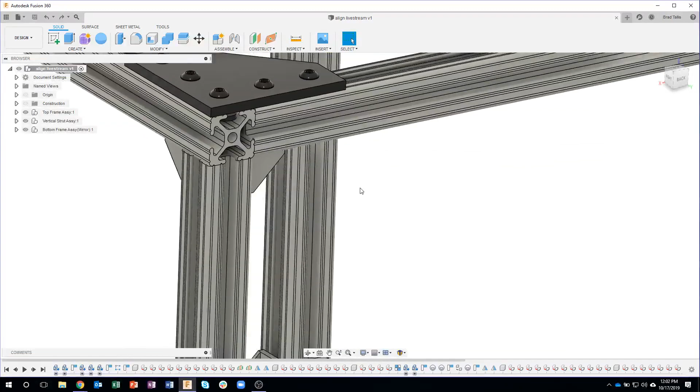Okay, so what I'm going to be talking about today is positioning parts in place without having to create a ton of joints. In fact, I'm going to zoom up on this corner here, and you'll see we're going to learn about bringing in some 80/20 extrusions, some mounting plates. You'll notice I even have some screws in here with their specialty T-nuts that slide in there. And believe it or not, there's not a single joint in this assembly, and you'll see that as we go through. So I'm going to go ahead and start a new design.

And you might ask, why not use joints? Well, when we're mocking something together like this, I don't want to have to worry about specifying all those positions and capturing positions, etc. I just want to mock up the design, and this is a rigid structure, so there's no movement going on. So I really don't need all of the different joint types, like revolute and the slider. So we're going to learn a new command under the Modify menu called Align, and I'm going to show the functionality of this.

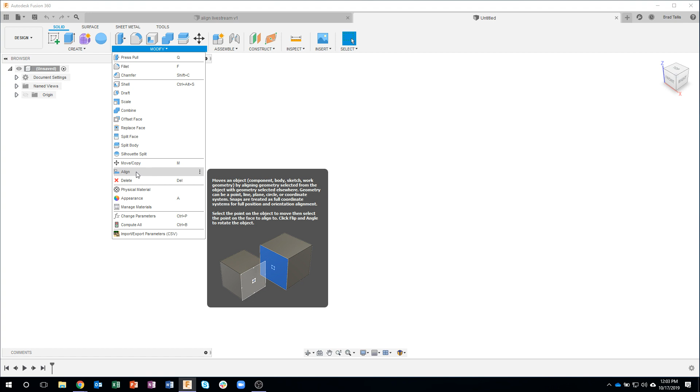We're also going to learn a couple other tricks, and a shout out to Peter. He made a funny comment on the Fusion 360 webpage saying, I love learning all these new tricks, so I appreciate that. I'm glad everybody's learning something.

I've shown this in the past where you can insert a McMaster-Carr component. But there's also another really powerful option in here called Insert a Manufacturer Part. And when I do this, it's going to bring up a web page, of course, on the wrong screen. So let me bring this over. Make sure that's working okay. Just a second here. Okay. And I want to get back so I can see what everybody's seeing.

Okay. So this is bringing in a manufacturer part, and you'll notice that it's got a bunch of different manufacturers. So for example, at the very top, we've got 80/20. You'll see ABB in here, and you'll probably recognize some of these, such as Bimba cylinders. There's a lot of electronic parts in here, like Eaton has a bunch of stuff. Maybe you need igus chains, so you can click on the I over here, and here are all of the different igus products. And so I'm going to show how you can insert this type of stuff right into Fusion.

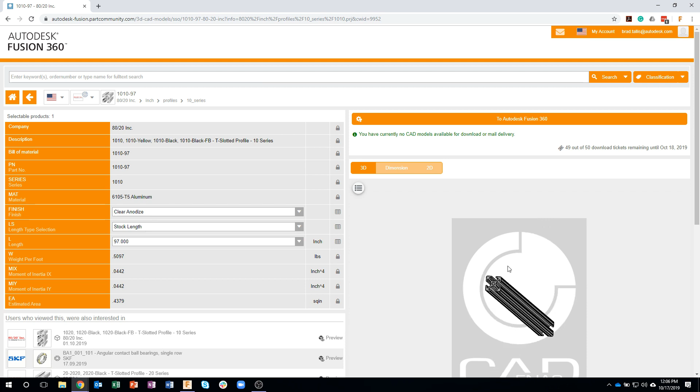And it gives you options, and it even brings up a 3D viewer. In fact, if I kind of rotate it, I'm going to have to zoom up here so you can kind of see the end profile. This is a really long example, so that's why it looks so long. But you can see that sure enough, that's a 3D model of that 80/20 extrusion. So you can verify that it's correct.

It gives us all the information about it, and then you'll notice right here it says stock length, which is 97. Well, I can come in here and say I want to do a custom length. And I can either drag or I could type it in. So for example, I'm going to come in here and do a custom length. Let's just do a custom length of 24.

Okay. Now you'll notice it says, okay, you've changed something. If you want to update your preview, you can, and it'll update that 3D preview, but you'll notice it'll be much shorter, a better representation of the actual part. So I really like this built-in 3D preview, so I can verify that, yeah, that looks pretty good.

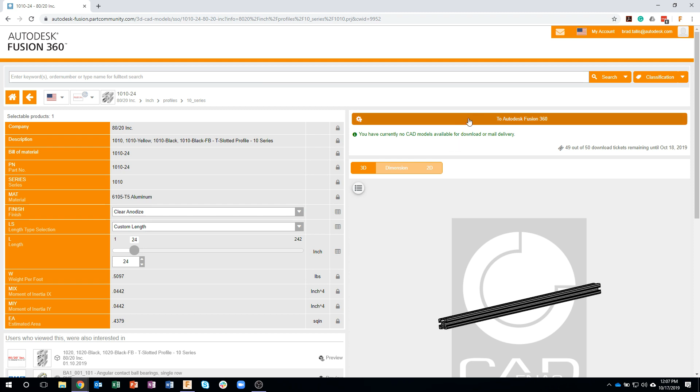Okay. Then you'll notice right here, to Autodesk Fusion 360. So I just click on that button right there, and it's going to bring up this little dialog that says open this application. So go ahead and say open. And let's confirm that that's going to work. So it's because I have these multiple screens. Yeah, there it goes. I'm going to have to bring up Fusion. And here you can see there is that 3D model from 80/20.

Now it's pointing up and down. I want it to lay horizontal, so I'm just going to grab this little button right there and kind of drag that down until I see 90 degrees. And so now it's kind of laying flat in the top orientation, which is what I want. I'll say okay.

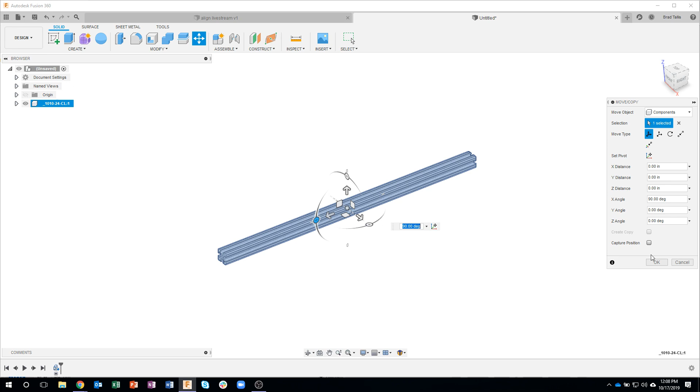Okay, so that's how simple it is. I did not have to draw the profile and extrude or anything like that. And this is just like any other Fusion file. So for example, I could click on this face, say press pull, and I could move and change the length of this part if I needed to. So by default, I brought in a 24-inch part, but I could come in and make changes to it just like it was created inside of Fusion.

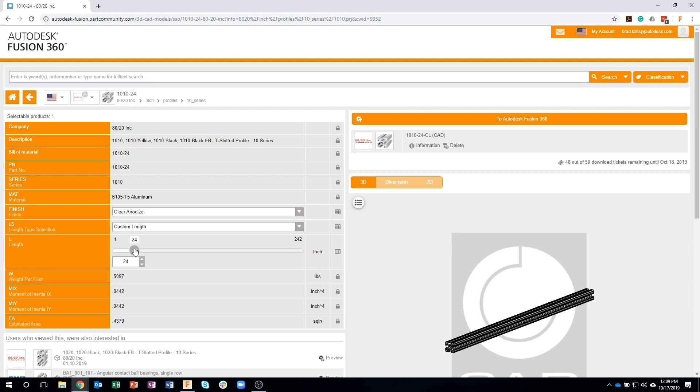Okay, so I'm going to do this a couple times to bring in some other parts. So let me jump back to that page right here. And now I want a custom length. Let's just do a custom length of 16 in this case. I'll say to Autodesk Fusion 360. Click on that open launcher. And I'll just jump over to Fusion, and you'll see it come into Fusion and add it into our current design. So there it is.

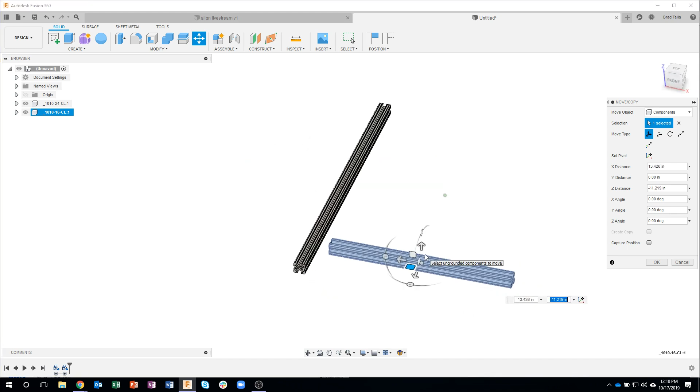Okay, so I'm going to go ahead and rotate this a little bit. And I'm going to rotate it this direction. And maybe I'm just going to kind of get it close to where it needs to go. Okay. So you can kind of see it's sort of floating in space right now. And I'm going to leave it where it is. I'm just going to go ahead and say OK.

And notice my browser. I'm going to go ahead and make this a little bit smaller. So here's the two different parts. There's the 24-inch part and there's the 16-inch part. In fact, I'm going to move the 24-inch part over just a little bit so it's not in the default location, because that's going to make things a little bit more observable in the near future. Otherwise, things would come in perfectly, and I want to show that it doesn't come in perfectly every single time, and we might need to reposition. Okay, so I've got my two parts.

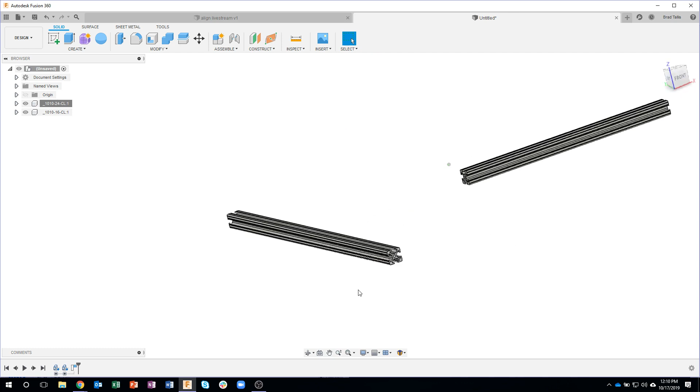Now, I want to line these up. And you might say, okay, we'll go ahead and use the joint command. So I'm going to say joint. Now, when you do a joint command, you get all these little markers and stuff to line things up. Well, for example, I don't have a sharp corner right here, so I really can't go corner to corner. In fact, if I zoom out, you'll see over here, there's not a corner to go to. And so creating a joint isn't always the best solution.

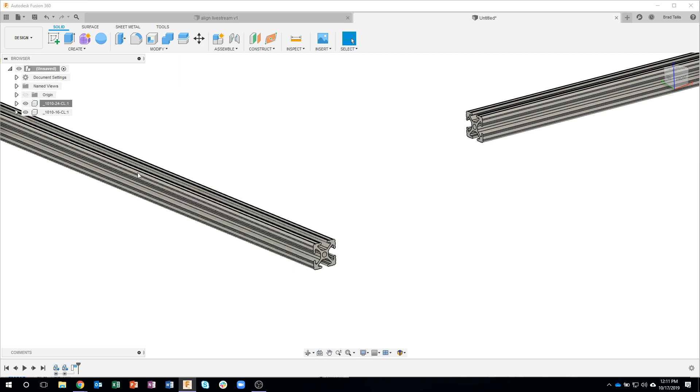So what we're going to do instead is we're going to use the align command. So I'm going to click on align, and you'll notice it allows us to align components from and to. So what I like to do is I like to get it lined up in 3 different axes. So for example, I'm just going to click on this face. I could click on these little markers. It really doesn't matter. But I'm just going to click on that face because I want to align that face with a face over here. So for example, this face, I want it to butt up against this face.

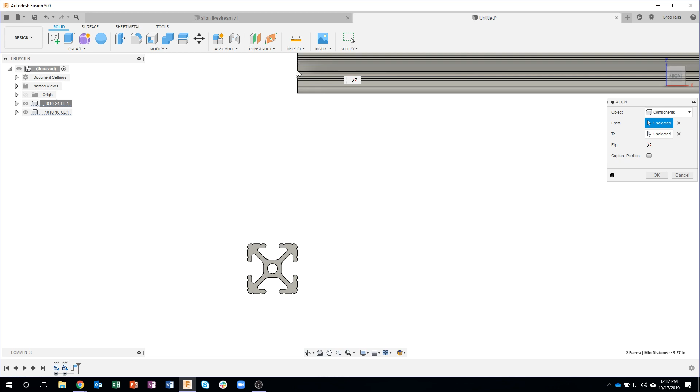So watch what happens when I click. You'll see that part slide over. And if we look at it from the side, or from the front, you'll notice that those are now lined up. So it aligned that face with this face down here.

Now I'm still in my align command, and this is what I think is so cool. I don't have to do 3 separate align commands. I'm just still in the align command. Maybe I'll say I want that face to align with this face right here, and you'll see it snap down. So sure enough, if we look at it from the front, we can see that we're aligned against that face and we're aligned against the top.

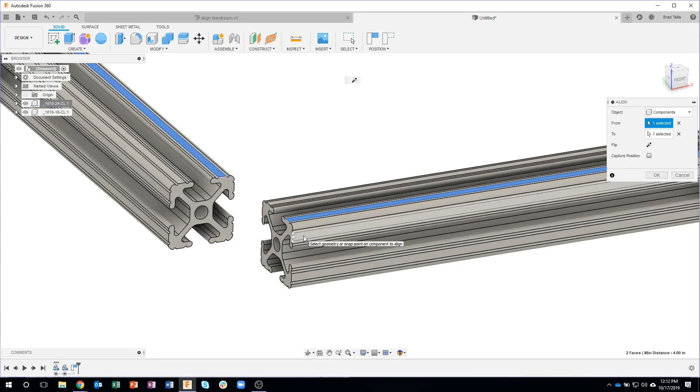And so really the last thing we need to do is say, okay, let's align that face with this face over here. And you can see how it slides that part into the correct location. And I'll go ahead and say okay. And there it is. And now you can really visually see that sure enough we weren't able to line up any corners or anything like that with a joint command. It would have been pretty difficult. I mean, it's doable, but I really like the align command. I think it's so much faster.

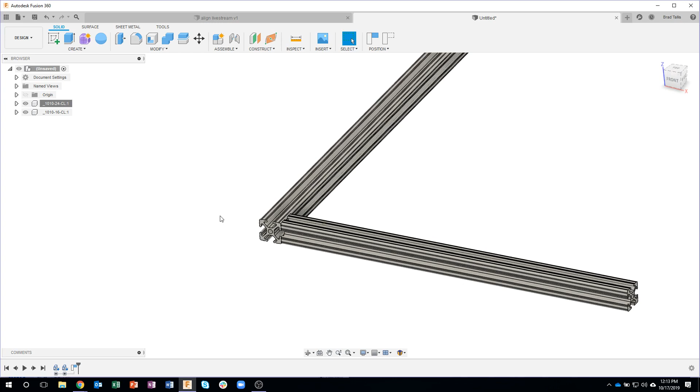Okay, so now I got these 2 parts where they need to be, but I want to join them together. So let's go back out to that page. And I'm just going to back up a couple steps. And I'm going to go into the joining plates. So I'll click on joining plates. And you can see all of the different manufacturer joining plates. And I can't emphasize how cool this page is. I mean, I use McMaster-Carr all the time, but this is so powerful with all of the different manufacturers out there.

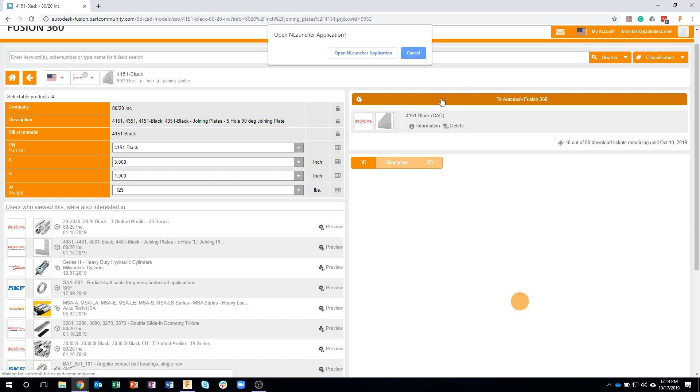Okay, so it looks like this guy right here. I'll use this one. Okay. Gives me, again, some options, tells me what the dimensions are, gives me a preview of what that's going to look like in my browser here and all that kind of stuff. Looks good. Even tells me what other people were interested in with this part. It's kind of cool. I'll say to Autodesk Fusion 360. Again, I could have sketched this, I could have drawn it, but that would have taken quite some time. So why not just bring in the manufacturer's part?

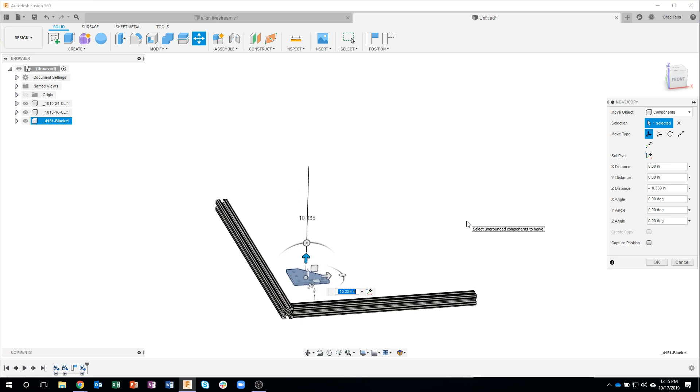Now it's pointing the wrong direction, so I'm going to go ahead and rotate. Let's just go 90 degrees that way. And I like to get it fairly close. So I usually look down at the top view, kind of position it where it sort of needs to be, and then I'll kind of zoom or rotate to the front view and just bring it down. Oops, a little bit too far. Something like that. I'll go ahead and say okay. And now it's kind of floating out in space, but it's fairly close to where it needs to go.

Okay, so let's use the align command. So I'll say align from. So I like to get it where it needs to go first. So let's just say maybe that face is going to sit on that face there. You see it kind of slide down a little bit. Then I could say that face and that face there, and you see it slide toward me. And then finally, that face and this face over here. And it slides into place.

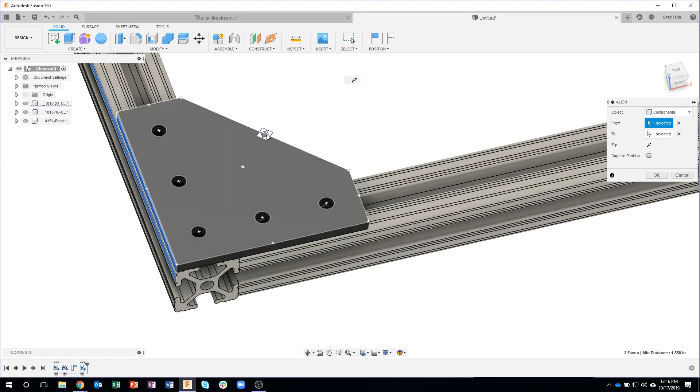Notice I'm not having to grab any of these, oops, wrong button, any of these tick marks or anything like that. I'm just basically grabbing faces. I'm saying align that face there with this face here, for example. It's very, very quick. I'll say okay, and it's now in the correct position. Hopefully this is making sense.

It looks like Aaron is actively answering questions.

So, okay, now let's bring in some hardware. Again, don't need to draw it. Let's just go out here. I'll back up a couple steps and say fastening options. Sometimes you can do a search, and I think it's 3042. Let me just do a quick search for that. It's from my notes when I was doing this earlier. So you can see all the different product numbers, and sure enough, there's 3042.

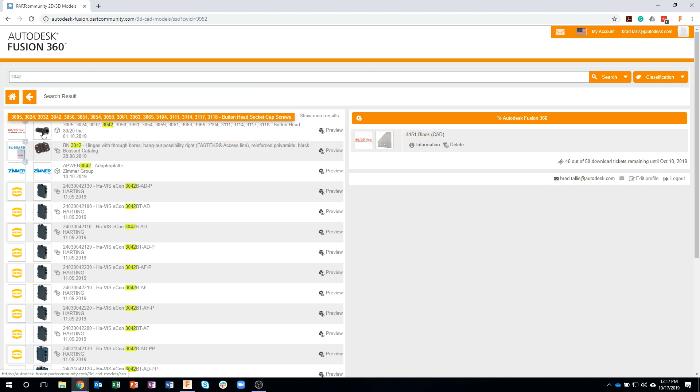It's this socket head cap screw. I'm sorry, not a socket head cap screw, but a button head cap screw, it looks like. So I can rotate it around, see what that looks like. I can specify the different threads in here if I need to. It's really cool, the different lengths. I'm just going to use the default one and say to Fusion 360.

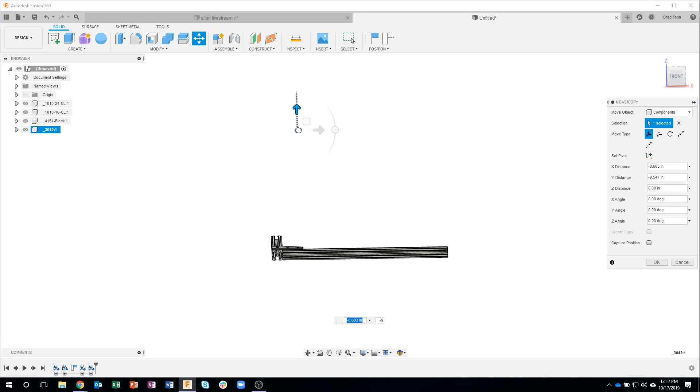It'll switch over to Fusion. Okay, and again, I like to get it sort of close, so I go from the top. I'll just kind of drag that over. Bring this down a little bit. And the only reason I do that is because I can kind of zoom up on this area and see that, oh, sure enough, the screw is pointing in the wrong direction. So I like to kind of get it oriented first. So I'll say 90 degrees.

Now I could use the align command, but you'll notice I'm in this move command right now. It's allowing me to move it around. And by default, it's allowing me to do a free move where I can just kind of move it around. But there's one in here called point to point. So I'm going to say point to point, and let's just look at the bottom of the head here, and you can see I can grab this edge, and it's a little hard to see, but there's a point right in the middle, right there. So if I just click on this edge, it's going to grab that point.

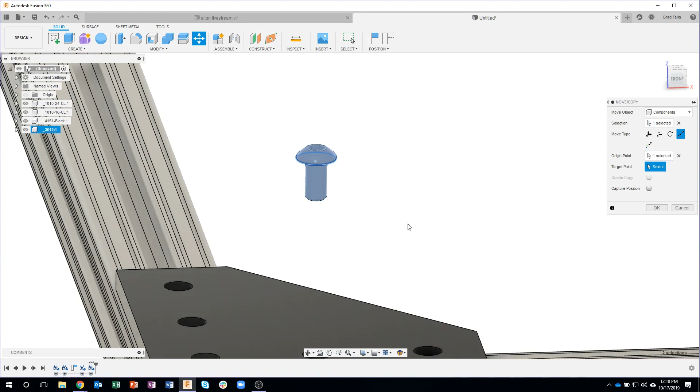Oops. That's my origin point. And then the same thing over here. I'm just going to kind of get near this circle and click, and it's going to move that screw from where it was to that new location. Let me go ahead and say okay. Because I picked this bottom edge of the screw head, it lined it up with the surface of the plate, and it's perfectly lined up in the circle. So it's kind of like a free move that we got. Didn't cost us anything.

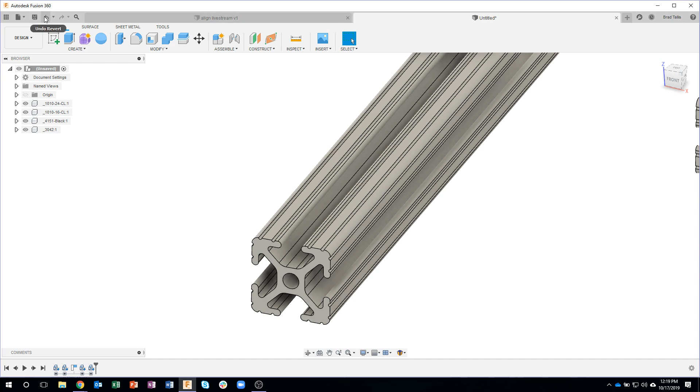Okay. Now, I think I see some people asking questions about, is align just like doing joints and stuff? No. In fact, if I grab this plate or this screw, I can move them out of location. There are no constraints or joints or anything like that being created as we're doing this. That's an excellent question. Oops. Let me undo back. So it's just basically getting them in the correct location, but there is nothing defining that these are constrained or jointed together. But we're going to get to that here in just a moment. We're going to learn some tips and tricks with that also.

Okay, so we can kind of see that sure enough, that's coming down through, and maybe I want to create a drawing of this or an exploded view later. So I want to actually show how this thing is going to get assembled. So I'm going to bring in one of their special T-nuts, I guess they're called. So let me back up a little bit, and I'll go to the fastener. Let's do this guy, and you'll see the different kinds that they have. So it basically looks like a special nut that can slide through.

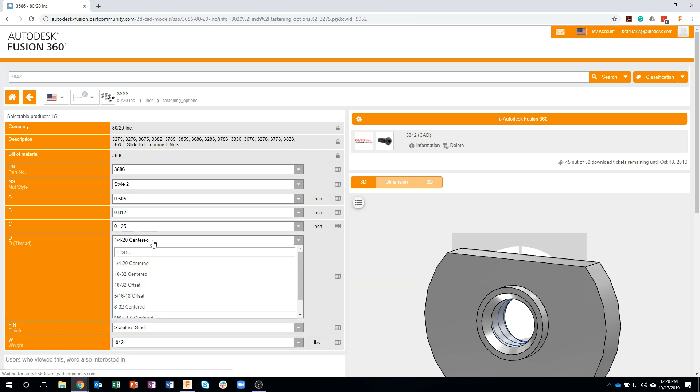Now I do know that the thread that I brought in was a 10-32, so I'm going to come in here and change this to 10-32, and it'll update, give me the correct part number, etc. I'll say that's good. Let's go to Fusion. Okay.

Thanks, Ron. I just glanced over at the chat. I appreciate that. Shout out to Ron Ownsby.

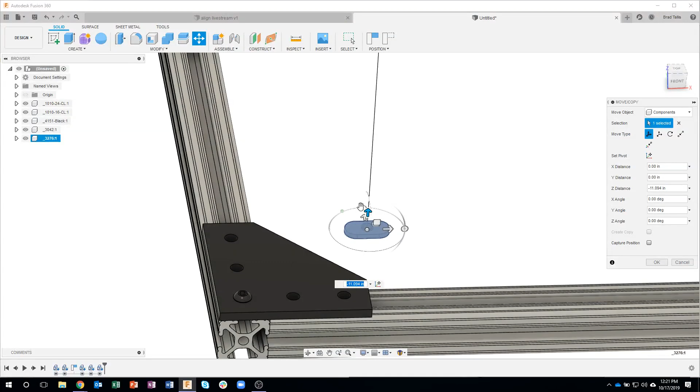So, okay, I'm going to slide this over. Bring this down. Okay. Again, getting it sort of close so I can kind of zoom up and see what's going on here. Well, I know I kind of need to rotate it. Let's just go 90 degrees in that direction. And once again, I'll use the, actually I won't use the point to point because we're going to see an issue that we're going to run into here if I were to use point to point.

So, in fact, I'll show you. I'll make a mistake here. So I'll say point to point. I'll grab that top edge. But then I need to select a circular edge here. And if I were to grab that edge there, you're going to see that it's going to sink my washer into our extrusion, which obviously we don't want to do. Okay? So I'm just going to go ahead and leave it right where it is. And we'll use the align command to help us out. Because remember, with the align command, I can do multiple aligns.

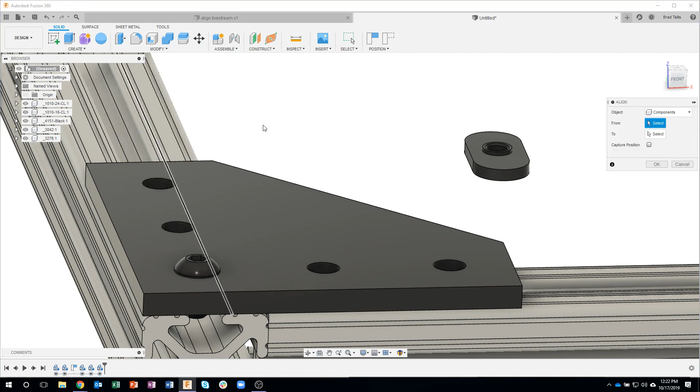So let's do align. And I'm going to do the exact same thing. I'm going to select that top edge right there. And I'll select that top edge right there. And you can see that it aligned it where it needed to go. But let's go ahead and turn off that plate. Now I'm going to align that face with this face, and you'll see it drop down.

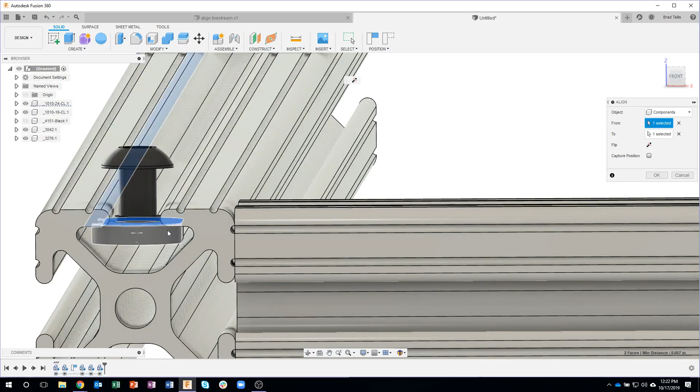And we're perfectly lined up axially through the center of the screw, and now it's touching the extrusion where it needs to be. So I'll go ahead and say OK. So again, you can see that's why I really like this align command. Okay, well, what about these other holes? Well, let's let Fusion do the hard work. Okay, I'm going to create a pattern.

Now, I could do a pattern on a path, but in this case, I'm actually going to do a rectangular pattern because it's kind of a rectangular part. So I'm going to say rectangular pattern.

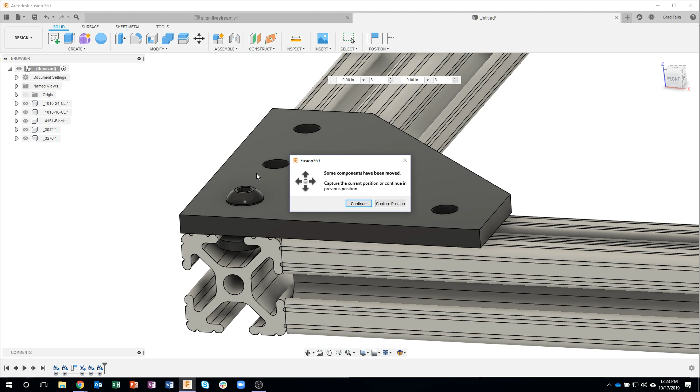Now, every once in a while, you'll get these warnings that say, hey, some components have been moved. Do you want to capture the current position, or do you want to continue in the previous? Well, I kind of like where it is right now, so I'm going to say capture the current position. And so it's going to tag in my timeline that screw and that washer were positioned where they need to be. Okay, so now I'm in my pattern command.

What are the objects? And I want to make sure I'm patterning, if it comes up default faces, I don't want that. I want to pattern components because everything that we're doing right now are components. Okay, so now I can say I want to pattern the screw and the nut at the same time.

Okay, what's the direction? Well, let's just go ahead and click a linear direction. And when I start to drag, we can kind of see a preview, and I'll move even further so you can see what's going on there. Okay. We have a distance of spacing or extent. Well, I know that the spacing of these holes is 1 inch, and that's just because I've done this before, but I could have measured between those holes, but to save time, it's 1 inch. And sure enough, you can see it positioned those where they need to be.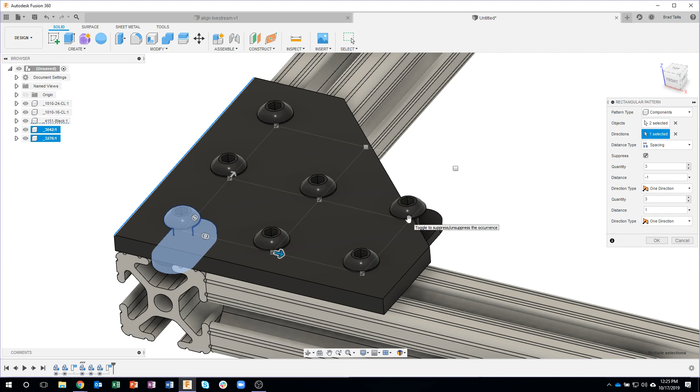Well, I also want to pattern in this direction, but notice I'm getting way too many, but that's okay. We'll fix that here in just a moment. So I know that this distance for the spacing is 1 inch also. And then notice this little suppress checkbox. What that means is every single one of these instances has a little checkbox, and I can just click on them and turn off the instances that I don't need. So I'm going to just click those 4 that I don't need, and I'll say OK, and I've just created a rectangular pattern.

We can see, it did the screws and the nuts. However, if we look over here, we can see that the nut is pointing in the wrong direction. So we need to rotate that around. Okay. Easy fix.

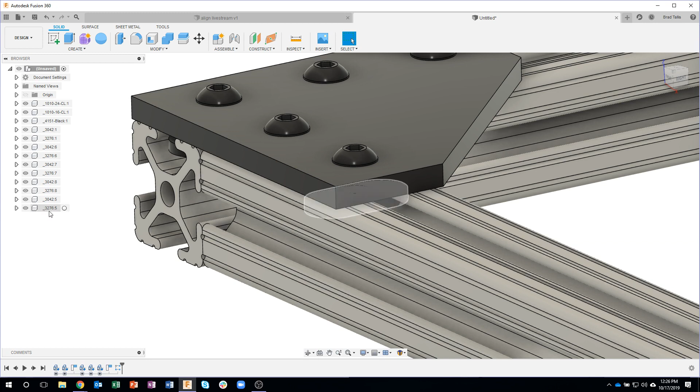Now here's a neat little tip. If you just hover over something in your timeline, you can see how it highlights it in your browser. So I can see that 3276 and 3276, those are the 2 nuts that I need to rotate. So I'm going to just click on it and say move.

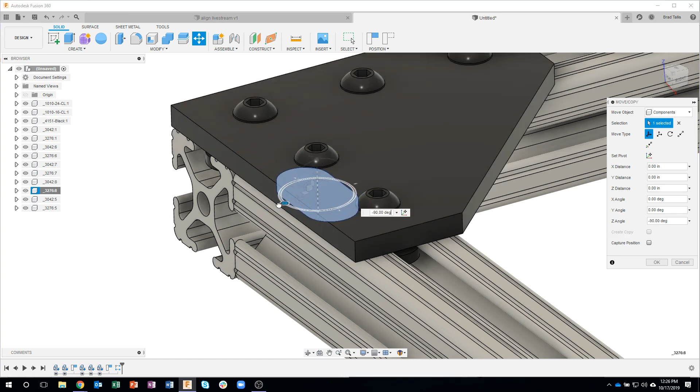And my origin is right in the center of that, so I don't even have to do anything except grab this guy and rotate it 90 degrees. And boom, we're done with that guy. And then the same thing with this one. Right click, say move, and we'll rotate. Oops, make sure I grab the right thing there. Sorry, I'll do that again. I'll right click and say move and rotate 90 degrees and say OK.

And if I were to do a section analysis now and slice through this, we can verify that the nuts are pointing in the correct direction. And everything's centered and everything looks really, really cool. Okay, now that was with me talking. Think about how fast we've created basically this corner of our enclosure here. We've got the mounting plate, we've got the screws, we've got the nuts in location and everything.

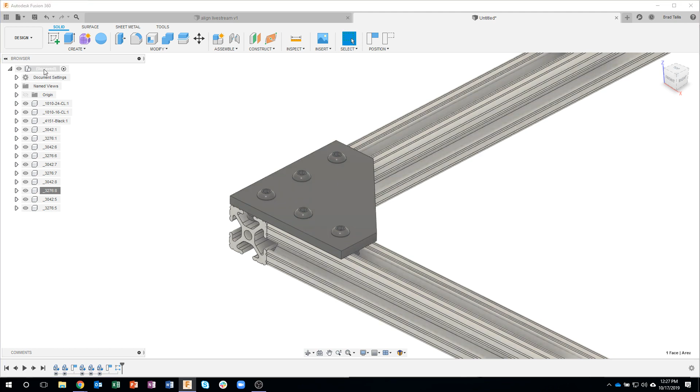Now, obviously I want to reuse this whole assembly, but I don't have it as an assembly right now. These are all individual components in my timeline. So what I'm going to do now is I want to start organizing. So I'm going to create a new component, and I think the easiest way to do that is right click at the top level, and you can see it says new component. And that's exactly the same as if I were to come up to my assemble menu and say new component.

But I'm going to say new component, and you'll see, sure enough, there it is. And I can rename it, and I highly recommend you rename your parts and your components because it makes things easier to find and deal with later. So I want to kind of create a sub-assembly of this corner plate.

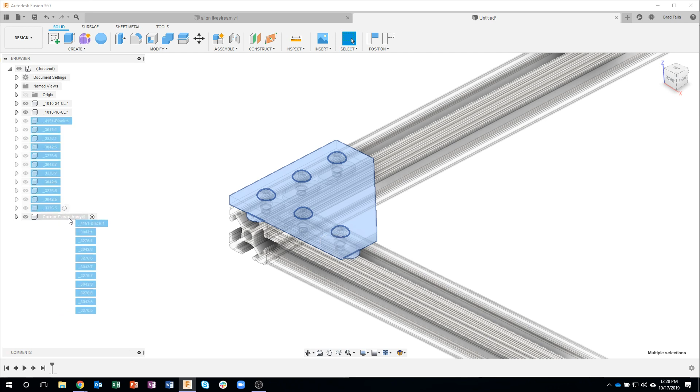So I'm going to just call this corner plate assembly, just something like that. And then I'm just going to grab all of the parts that have to do with this corner plate assembly. So there's the big blue part there and all of the screws and nuts. So I'm just going to highlight all of those and drag and drop it onto my corner plate assembly. So I'm dropping it there.

Now, like I said, you might see this pop up. I'm going to go ahead and capture the position, but notice what happened. It put all of those components underneath this corner plate assembly. And if I were to toggle the visibility on or off, we can see that that's almost like a sub-assembly. It makes it really easy to kind of figure things out. Okay.

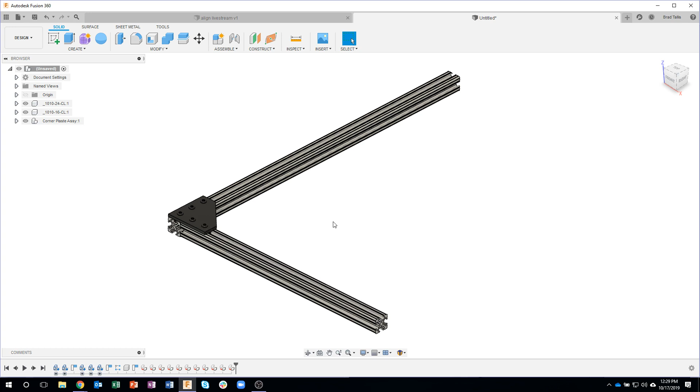Let me go ahead and activate my top level again. Now I want to start mirroring some things around since I don't want to have to keep reinserting. I've already got what I want. So I want to mirror this onto the other side over here. Well, to do a mirror, we need to have a plane or an edge or something that we can mirror along. And I don't have that here. So I'm going to create a construction plane. And one of my favorites is this mid-plane construction plane. So I'll go ahead and select that.

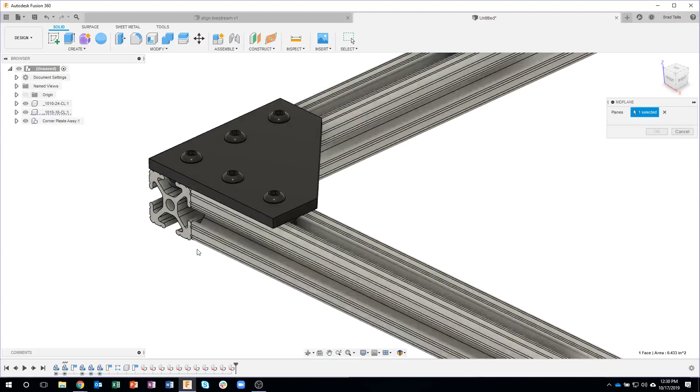And I'll come over here and grab that face there. Then I'll come over here, and depending on where you move, you can kind of see how it's highlighting that face. I'm going to go ahead and click that face there. And what it did is it basically sliced it in half, and it put this plane exactly in the middle of those two faces. Okay.

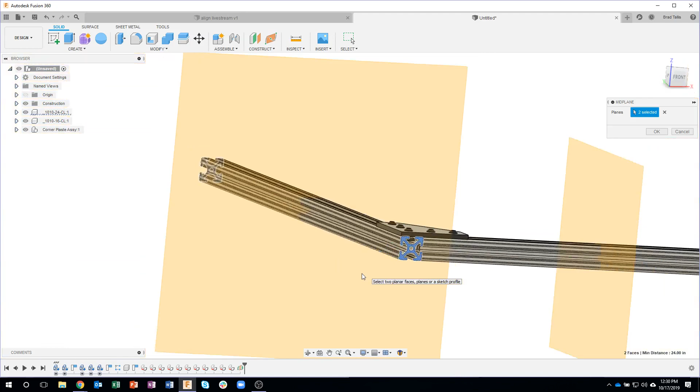And I'll do the exact same thing because I'm probably going to mirror in the length direction also. So I'll do a mid plane. And let's just grab this end face like so. And I'll kind of rotate so we can kind of see. And I'll grab that face there. And I now have a construction plane that slices right through the center of that long arm. Okay, I hope this is all making sense.

Okay, so now that I have what I want with these construction planes, let's start using the mirror command. So I'll come in here and say create mirror. Again, I want to make sure that components is selected. Sometimes by default, faces is selected. So just kind of verify that we want to mirror some components. And I want to select the corner plate and this arm right here.

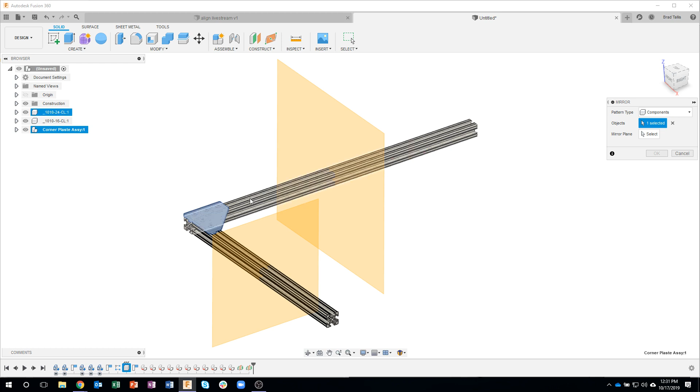What's my mirror plane? It's going to be this plane right here. And you can see how that brings that across. I'll go ahead and say OK. That was fast. And again, everything is where it needs to be. We haven't done any joints or anything like that.

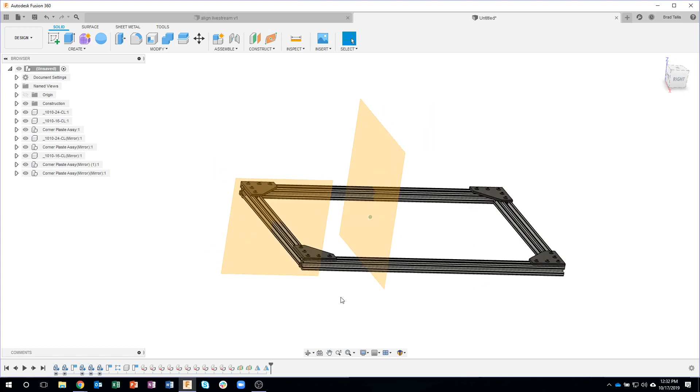Let's do that again. Let's go ahead and say mirror. Components. I'll do the 2 corner plate assemblies now. And then this 16-inch piece. What's my mirror plane? That guy. And I'll say OK. And there is our top frame, basically, of our enclosure. So we let Fusion do the hard work.

Okay, like I mentioned before, I like to keep things organized, and you'll see here when I jump back that we've got a lot of parts in our structure browser. So now we're going to kind of organize that and make things a little bit easier to deal with, because you'll see some of these say mirror and mirror, mirror, all that kind of stuff. So I'm going to turn off my construction, and let's create a component, new component. And let's just call this top frame assembly.

Okay. And then I can move all of these components. So I'm going to just shift select all of them. I'm just going to drag that into this top frame assembly. And notice my browser looks nice and clean. If I were to expand this open, we can see we've got these parts in here. Well, now maybe I want to organize even a little bit better.

So check this out. At my top frame assembly, I'll right mouse click and say new component. And this is why I like to use the right mouse click, is because it's going to create a new component underneath that level right there. And I'm just going to call this, let's just call it corner plates assembly.

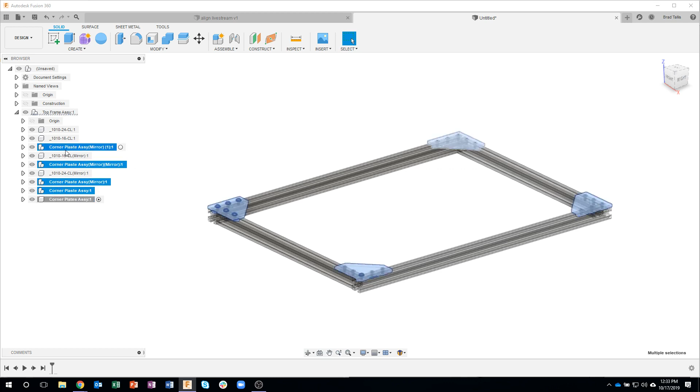And I'll select these 4 corner plates, drag those into my corner plates assembly, and now I'm just left with the 4 extrusion pieces, the 80/20 extrusions, and my corner plate assemblies. And what's neat about this is, for example, I could turn off those corner plates, and now we're just looking at the extrusions. It just makes things so much easier when you organize them like this to kind of keep things simple. Okay.

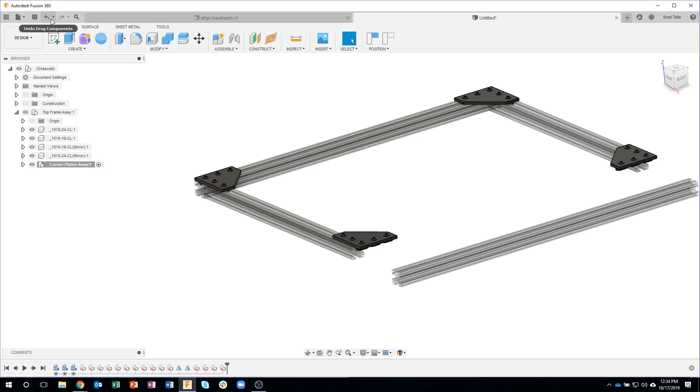Okay, like I showed before, we haven't created any joints, so everything is separate. Now, obviously, we're kind of screwing this thing together. We want it to be one kind of like solid thing. So I'm going to use this rigid group command. So I'm going to go ahead and say rigid group. And what are the components? I'm going to just select that whole top frame assembly.

And notice it says include child components. So it's going to grab that and everything underneath it, no matter what level it's at. So I'm going to go ahead and say OK. And this is now a solid group. I mean, it's a rigid group. If I grab on any of it, it moves around like it's assembled together.

And this is what I was talking about earlier, where we don't have to use joints and stuff like that, like rigid joints over and over and over again. We positioned it the way we wanted to using the align command, and then we came in and said, let's make this a rigid group.

Hopefully that makes sense. I see they all gave us a thumbs up. I appreciate that. So hopefully you're learning some new tips and tricks with this. Okay, let's continue on.

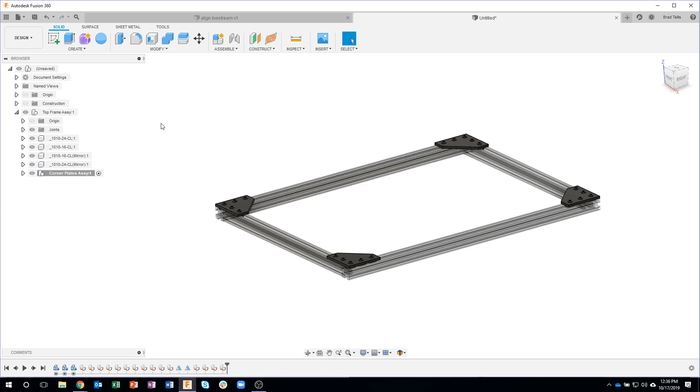Okay, I'm going to activate the top level because I'm going to bring in some more components now, and I want them to come in under the top level and not underneath my top frame. So that used to be active. So I just went in here and said activate the top level component. And now I'll go back to my web page. In fact, I'm going to go ahead and save just for fun. We'll call this frame. Okay. So now I'll bring back that web page. I'll back up a little bit.

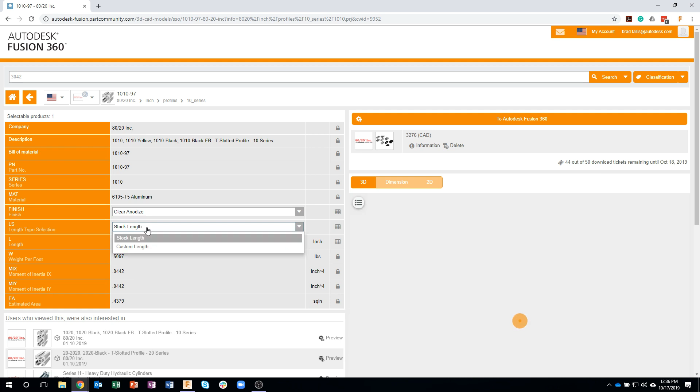We're going to bring in another profile, the 10 series profile. I'll change the stock length to a custom length. Let's just do maybe 16 in this case. We'll make it a little bit smaller. So here's a little tip. You'll notice I've been dragging this slider.

Just when I was playing around, I noticed something where, you notice it says 60. If I come in here and type in 16, this still says 60. If I were to send it to Autodesk, sometimes it brings that 60-inch length. So I like to click somewhere else on here, and you can see how it dragged that slider for me. And now I'm confirmed that that's 16. So just a little tip there when you're using this product.

So I'll go ahead and send it to Autodesk Fusion 360, because that's the coolest tool out there. And we'll bring this in. Okay. I saw somebody said, I need that link. It's right here. It's actually not a link. It's under the Insert menu. Insert a manufacturer part. We should probably do another one just on this particular command, because there's so much stuff out there. Electronic components, pneumatic cylinders, everything you can think of is under this manufacturer part.

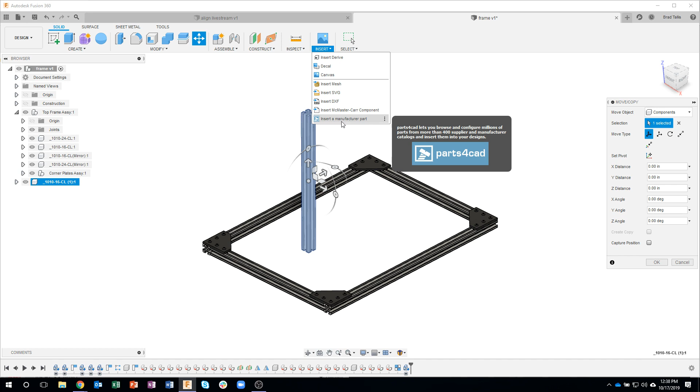It's really, really cool. Okay, now I'm going to throw us a bone here. I'm actually going to rotate this and make it come in at a really weird, wrong angle, okay? Because sometimes maybe you're bringing in something from another CAD tool or whatever, and it comes in the wrong position. Something like this, for example. And I just did this to show the power of the align command.

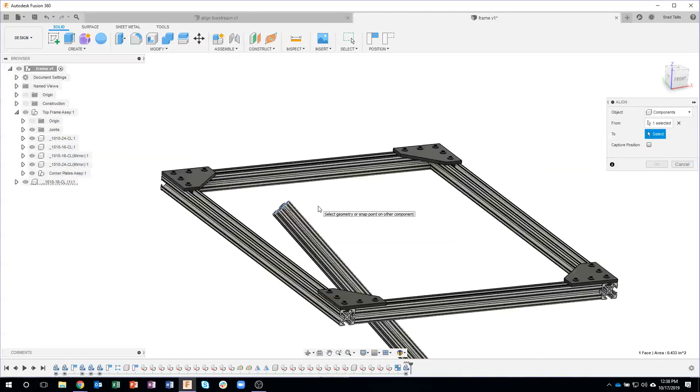So I'm going to come in here and say align. And I kind of like to do the major axis first, so I'm going to go ahead and select on this face. And then I'll select maybe on this face right here, and you'll see that it straightened that up. Okay. Now it's still angled a little bit funny, but it's pointing up and down now.

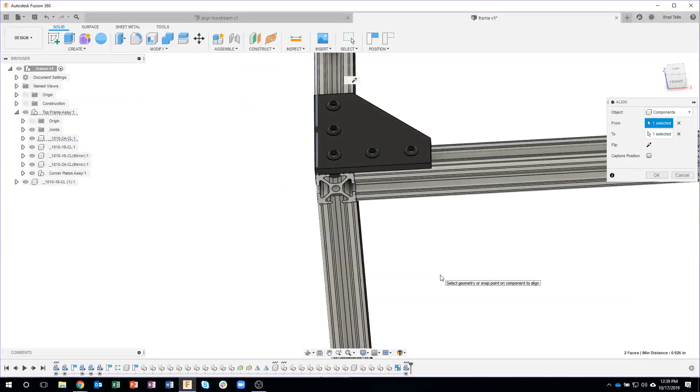So maybe I'll come in and say, okay, I want to align that face with this face here. And now you can see that that's lined up. And then finally I'll do that face and maybe that face there, and it slides it over. So even though that part that came in was in a really weird orientation, the align command straightens everything up for us. And there we go. Okay.

Okay. Just for fun, I'll continue inserting some stuff. Kind of repetitive, but you kind of get the idea just how fast we can do things in here. So I'm going to go into joining plates. And I want to do a corner bracket. So I'm going to do maybe like this inside corner bracket.

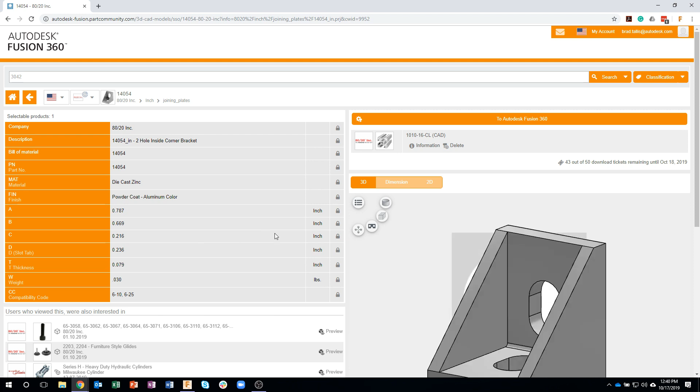And what you're going to notice here, I'm going to bring this in, and there's going to be an issue. So, in fact, let me zoom out here so you can kind of see what this looks like. It's got some alignment tabs and all that kind of stuff. It's really cool. I'll go ahead and say to Fusion. It'll bring it up. Okay.

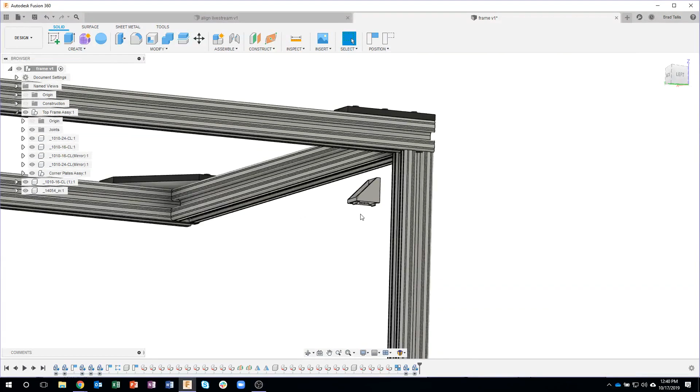And once again, I like to get it close. So let's just go here and here, maybe over to the side just a little bit, and then I'll bring it down. Kind of like so. Okay. Now, I clicked OK too soon. I need to rotate it. So let's go ahead and select on it. I'll say move. And I'm just going to rotate that 90 degrees, like so.

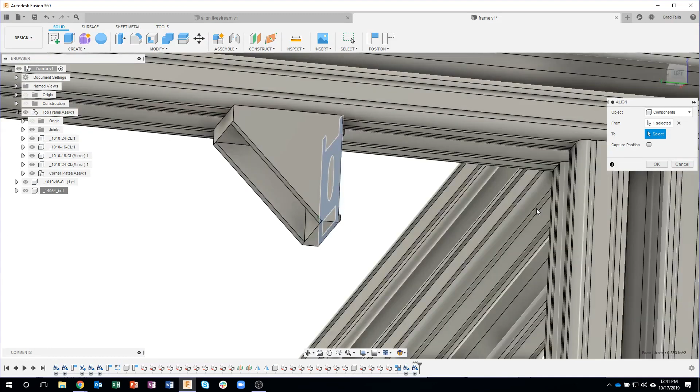Okay. Now, I've been showing the power of the align command, so let's do that again. So I'll come in here and say align. Let's just say that face with this face here. Then I could say, for example, that face with this face here. I'll have to zoom up just a little bit, make sure I can grab the right face. And then finally, I'll say that face with this face over here. And it's now in position.

But if we look at it kind of from the side, you'll see that it's not in the correct location. And that's because I originally said align this outside face with the outside face here. Well, this piece is narrower. It's not as wide as our extrusions. So here is where the align command really doesn't help us yet.

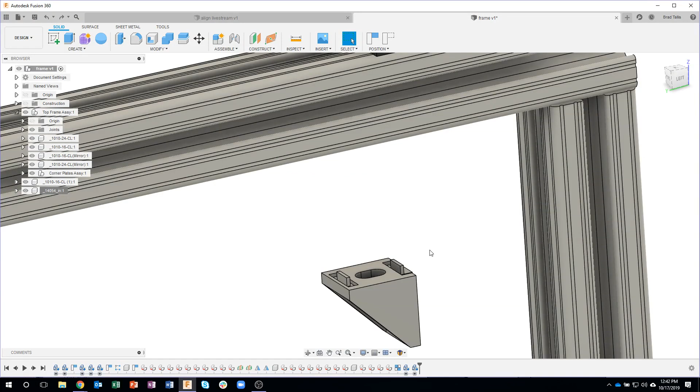I'll paraphrase that. So I want to center this thing. And using the align command, we're having to go face to face. And there's no face in the middle, and there's no face in the middle here. So I'm going to have to take an extra step. And that is going to be by creating a special joint origin. So under the Assemble menu, I'm going to say Joint Origin. And I'm going to go ahead and capture the position.

Now, it says simple, but if I click this little down arrow, there's an option in here called Between Two Faces. And this is an extremely powerful option. So I'm going to say Between Two Faces, and I want to go between that face there and that face there. Okay. Now, if I leave my mouse for a second, it says Place Joint Origin on a component.

And what it's basically asking for now, let me kind of rotate around, is it's splitting that part in half. And you can kind of see that with this, oops, I was hoping to not move too much, that gray or tan plane. And so what it's asking for now is where on that plane do you want this joint origin? And I basically want it along this back corner. So I'm just going to click on that edge.

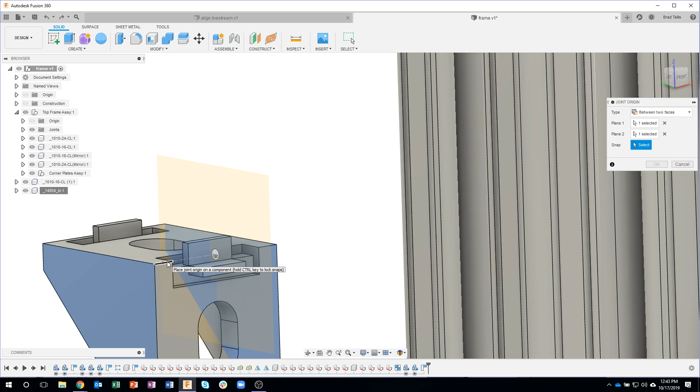And now hopefully this will make more sense. It put a joint origin in between those two faces on this edge. And you can kind of see this little coin right here. That's our, and there's a dot that kind of covers it up, unfortunately. As soon as I say OK, it'll make more sense. Let me go ahead and just say OK.

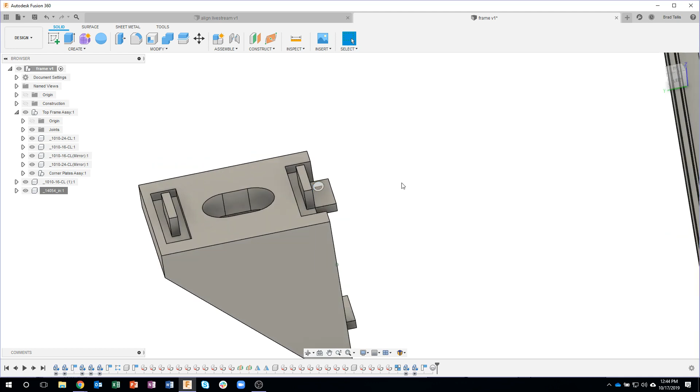And there's that joint origin. It's halfway between those two faces, and it's on that edge. So you can kind of see it's right on that edge. Okay, so that's cool. I've got a joint origin there. I'll do the exact same thing with my extrusion over here. So I'm going to say joint origin

between two faces, and I want it to go between that face there, and I'll flip around and say that face there. And just like before, it's asking where do you want that joint origin to be. So if I hover over, for example, this line, you'll see that it's going to split that part in half by putting that plane there, and then it's putting the joint origin on that line.

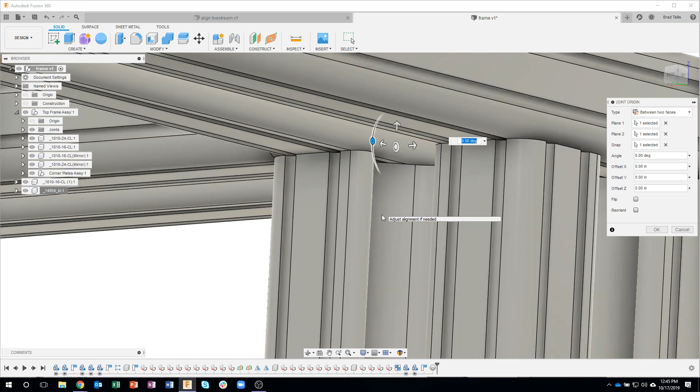Now, here's the catch, and it's kind of hard to see. I saw it before. The coin, or the smiley face, some people call it, was pointing straight up and down. And I want to be pretty careful. I want it to be pointing in the same direction that this one is. You can almost think of it as like a coordinate system. We're going from one coordinate system to the other. So I want the solid part to be at the top. So I'm going to rotate this 90 degrees.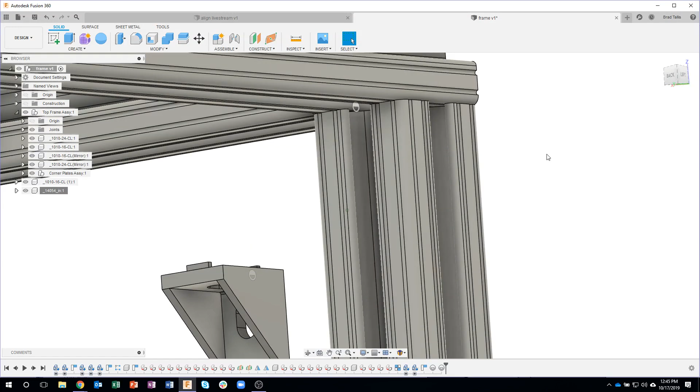And again, this will make more sense as soon as I say OK. And now you can see that that joint origin, which kind of looks like a happy face, is in the same direction as this joint origin is over here. Okay? And it's in between those two faces, and it's right on that edge. So check this out now. I can come in and say align.

What do I want to go from? I want to go from a component. Let's go from. And all I have to do is get near that, let me make sure I can see it, near that joint origin. I'm just going to go ahead and click on it. And where do I want to go to? I want to go to that joint origin.

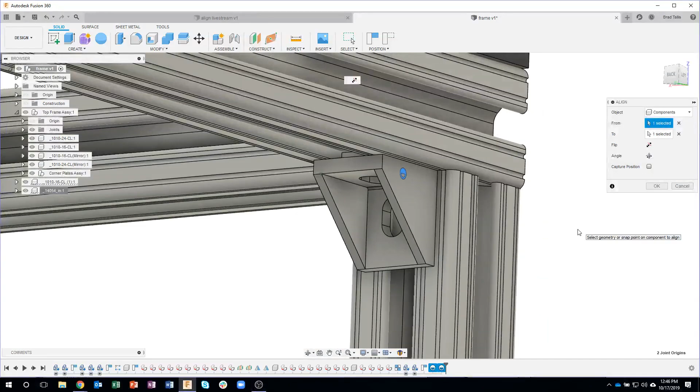And notice what it did. It's perfectly centered. And it runs along this edge. Hopefully I can point to it. That edge right there that I can't highlight. So by creating those two joint origins, it allowed us to line those up.

So you can almost think of it, you know, if I have this origin and I have an origin like this, we basically lined them up so they match up together, okay? If this were like this and we said move this one, it would rotate and try and line up like that. So that's why I spent the time to make sure that those smiley faces or those joint origins were pointing in the correct direction. Okay.

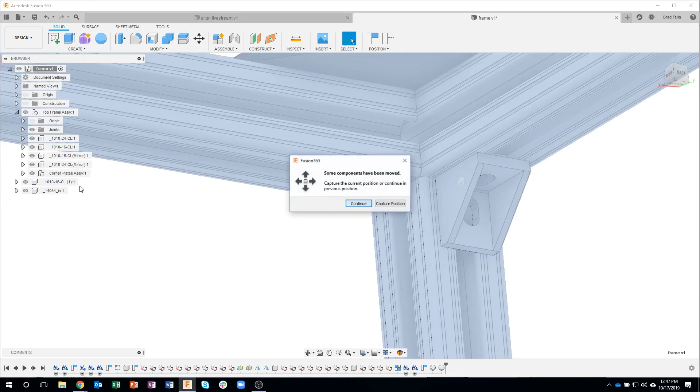Okay, let's continue on here. Now, I could bring this back in, but let's just go ahead and copy this. So I'm going to say copy and paste. So I'll go ahead and drag this over. I'll rotate it around so it's kind of pointing in the right direction. So 90 degrees. And now you'll notice that it copied that joint origin with this part. So I'll go ahead and say okay.

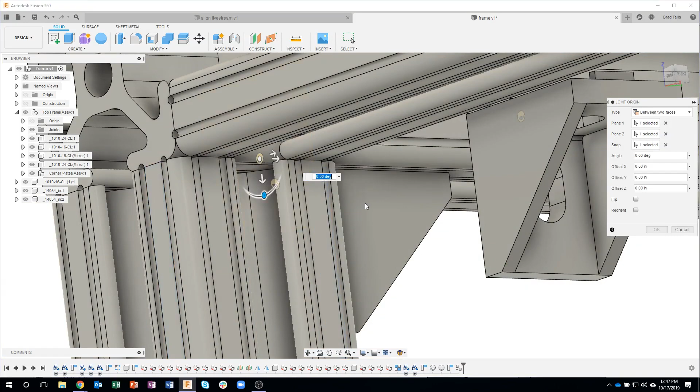I do need to create one more joint origin instead of two. So I'll say between two faces. I'm going to go a little bit faster since we're running short on time. So I'll go ahead and click there and there. I'll grab that little line like so. Looks like the smiley faces are kind of pointing the same direction, so I'll say okay.

Sure enough, they are. Now, you could always come in and edit this. You could rotate it around, offset it, do all that kind of stuff. So if it's pointing the wrong direction, you can always go in and edit that. Okay, let's align those together. I'll say that joint origin with that joint origin, and boom, it's in the right spot. There we go.

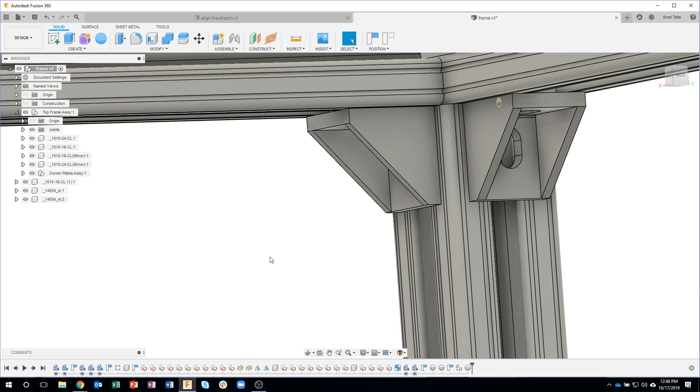And now all I need to do is basically what I did before. I want to basically copy these or mirror these around. Well, guess what? I already have my mirror construction planes. So let's just do this. I'll come in here and say create a mirror. And I'll say I want those three to mirror around that mirror plane. I'll say okay.

Mirror again. And I could select them on the screen right here, or I can grab them from the browser. So I can grab all of those parts, mirror plane here. I'll say okay. And now we have these vertical struts.

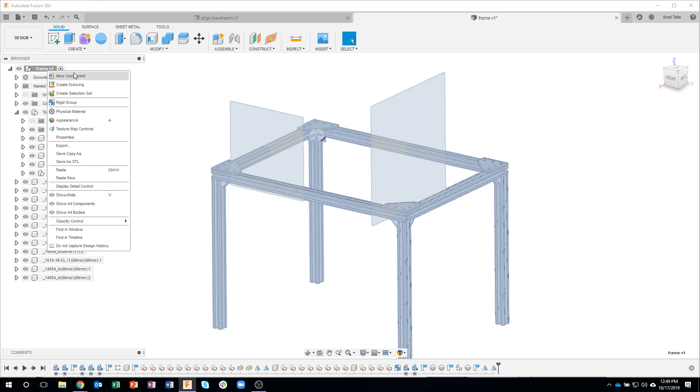Now, again, starting to get a little kind of crazy in my browser over here. So let's create a new component. And I'll call this vertical strut assembly. And then I can just grab all of these parts, like so. And I'm just going to drag that into the vertical strut assembly.

And so now if I were to fold that down, you can see we've got this top frame assembly, which I can turn on or off. And I've got this vertical strut assembly, which I can turn on or off. And let's just say I want to create a sub-assembly in here, so new component. And let's just call this corner brackets assembly.

Now, here's a neat little trick. I've shown this in a previous live stream. I've got a lot of parts in here, and I want to move certain ones. And I know that the ones I want to move are these underscore 14054. So I want to select those. So I'm going to come in here and say select by name. Okay, and you can see I've already done this, but I'm going to type in underscore 14054.

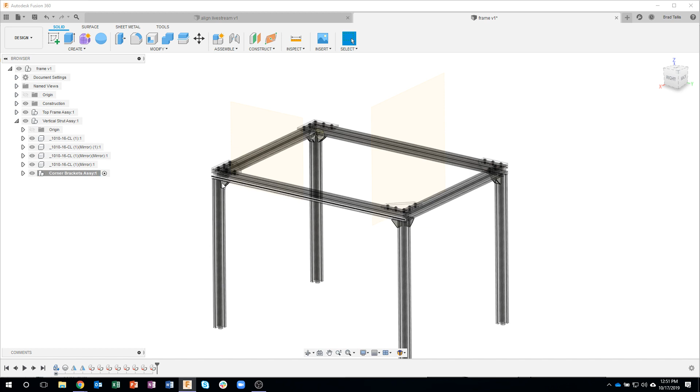And I'll say find, and notice it went through and found anything that had that 14054 in it, and it selected them for me. Now all I have to do is, oops, let me say OK first. Drag and drop into my corner brackets assembly, and all of my little angled corner brackets went into this subassembly because I did a search for that 14054.

So it's a really cool way, if you have a lot of socket head cap screws or washers or nuts or whatever. I think this is a great tip on selecting a whole bunch of parts and organizing them into this subassembly.

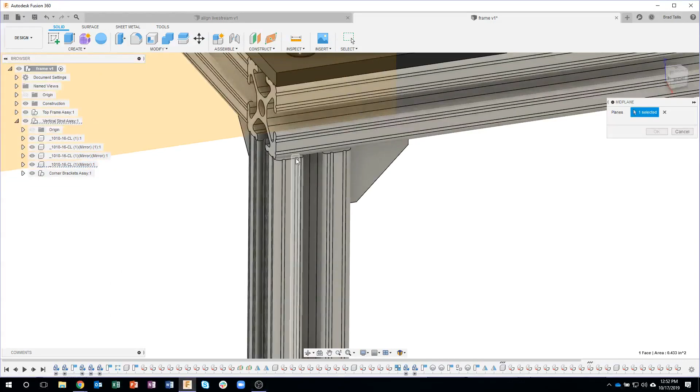Okay, so now the last thing I want to do is maybe put this top assembly onto the bottom. So I'm going to need to create one more construction plane. So I'll say mid plane. Let's grab that guy there. And I can click that top face there. And you can see it's slicing through the middle there. I'll go ahead and say OK.

Let's create a mirror. Components. I'm going to mirror the whole top frame assembly and the corner brackets assembly. So I expanded open my vertical strut assembly and I selected this sub-assembly. So I'm mirroring that guy and that guy at the same time. What's my mirror plane? There we go. I'll say OK. And now we have something that looks like this.

So obviously I might want to come in here and rename this to be bottom frame assembly. And maybe I want to put these corner brackets inside that bottom frame assembly. Actually, I lied. I put them in the wrong spot. I want those to go into the vertical strut. So you can actually see if I highlight my bottom frame assembly, it's highlighting all those angled corner pieces. I want those to be part of my vertical strut assembly. So I'm just going to come in here and drag that to vertical strut assembly. And now we can see all of those turn on and off.

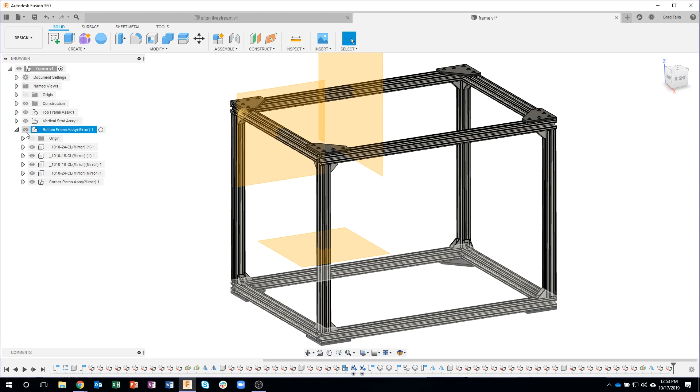Okay, we are almost at the top of the hour. Let me go ahead and turn off my construction. Now here's something kind of neat. I've got my enclosure totally designed. Let's go ahead and save it. I'll say finished. But let's say maybe it's a little bit too tall. Now I don't have any parameters or anything like that that drives the size of this, right? Because we inserted particular length 80/20 extrusions. We had 24, and I think these were 16 or something like that. I can't quite remember. But check this out.

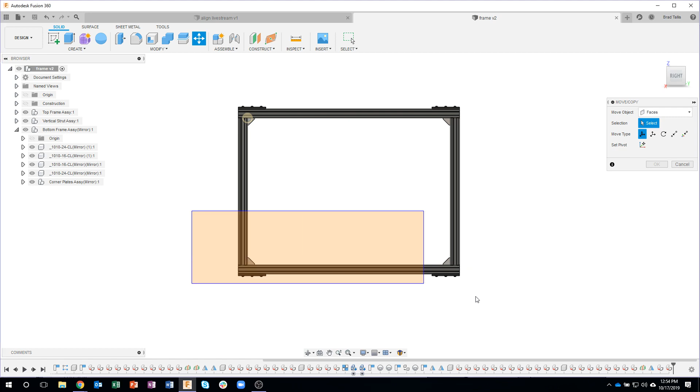I could come in here, look at it kind of from the side, and I'm going to say move. Now this time I do want to make sure I have faces selected. I'm just going to draw a box around the whole bottom of my design here. In fact, I'll go ahead and rotate a little bit. And I want to make sure, sorry, I had too many things selected. Select through, I want to make sure it's turned on. So I'll come in here and say move, faces. I'm just going to draw a box around everything. And you'll see it'll select all of those parts and faces. And now I can tell it to move.

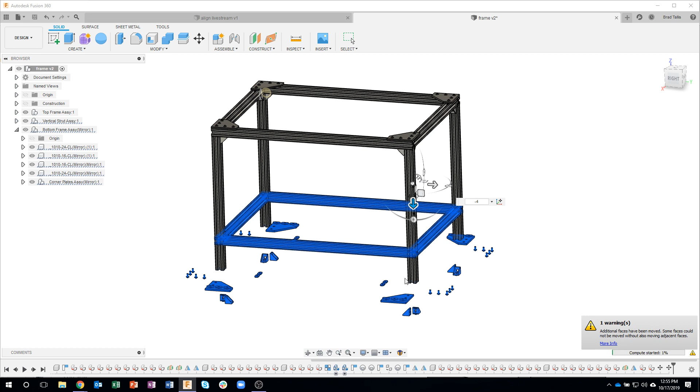Now, sometimes I get a weird result when I do this. Like parts seem to kind of move out and away. And I think that's because of the mirrors and stuff like that that's going on. But don't worry about that right now. I'm going to come in here and say, I want to move this 4 inches up. And I'll say OK. And it's doing all the calculation. Basically, it's moving whole parts if it can. And then it's moving the faces also. So I just changed the height of my enclosure by 4 inches. Or I shortened it, I should say, by 4 inches.

Okay. I know that was a lot of information, a lot of repetitive stuff, but the key thing here was the align command. I really like it. I use it a lot, especially when I'm doing stuff like this where things are all connected together, bolted together, glued together, like a picture frame, for example. Sometimes I'm helping customers out and I see hundreds of joints. And I show that you can do these rigid groups and have minimal joints. Maybe get the thing together using the align command and then create a rigid joint.

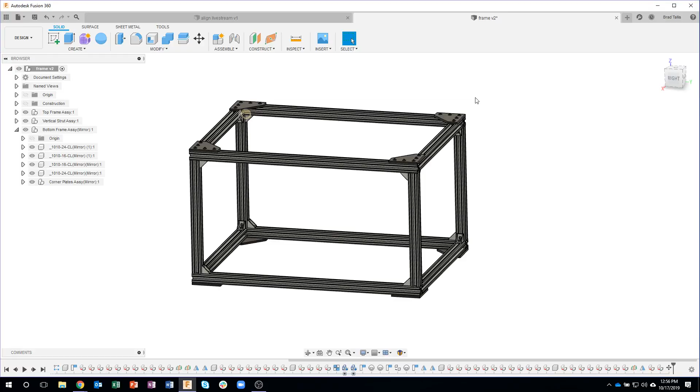The key things, I really like this insert manufacturer part, so give that a try. You do have to log in for the first time. You can see I have my login up there, but it's free, doesn't cost anything to do this. And check out all of the different customers that are in here. I mean, I could scroll forever. There is a ton of them in here. So if there's a certain thing you're interested in, see if that company exists out here. If you're doing a lot of electronic design, if you're doing a lot of 80/20 or whatever, give that a try.